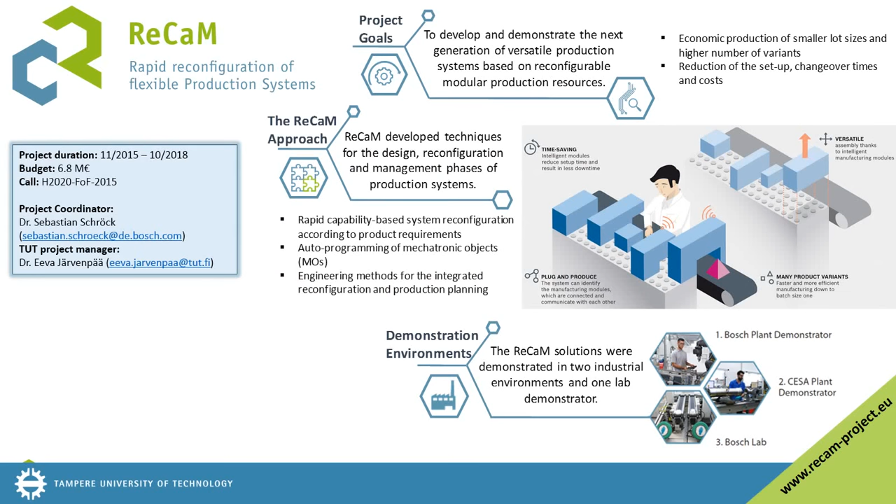Let's start by a short introduction to the ReCaM project in general and its targets. ReCaM was a Horizon 2020 research and innovation program funded project running between November 2015 and October 2018 and coordinated by Bosch. The project had 9 partners. These partners included manufacturing end users, technology providers, and research institutes and universities from different European countries.

The project targeted to develop versatile and easily reconfigurable production systems that would allow economic production of small lot sizes and high number of different product variants, and to reduce the time and cost of product changeovers and system setups.

To support these goals, ReCaM developed different techniques and systems to facilitate the design, reconfiguration and management phases of production systems. These included, for instance, an approach for capability-based matchmaking of product requirements against resource functionalities, auto-programming of mechatronic objects, and engineering methods for integrated reconfiguration and production planning. The ReCaM solutions were demonstrated in 1 laboratory and 2 real industrial environments.

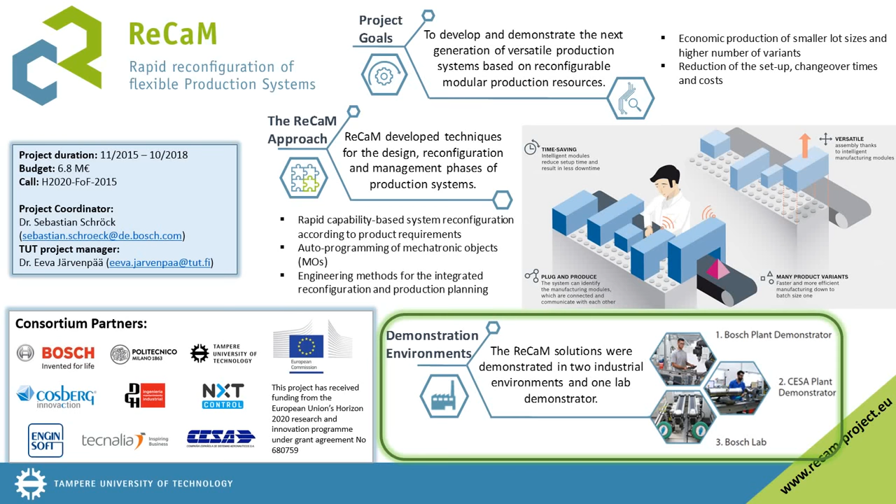This video will focus on the work conducted by the research group in Tampere University of Technology, Finland, namely the resource capability management and matchmaking. First, we want to give you an overall idea of the capability matchmaking concept. After that, we will go into more details of each component which makes such matchmaking possible. In the end, we will demonstrate the concept with real industrial data.

Let's start by explaining the overall objective of the capability matchmaking. The matchmaking scenario always starts with the need of producing a specific product. The system designer needs to figure out what kind of resources are needed to manufacture and assemble that product. Matchmaking supports both brownfield and greenfield design scenarios.

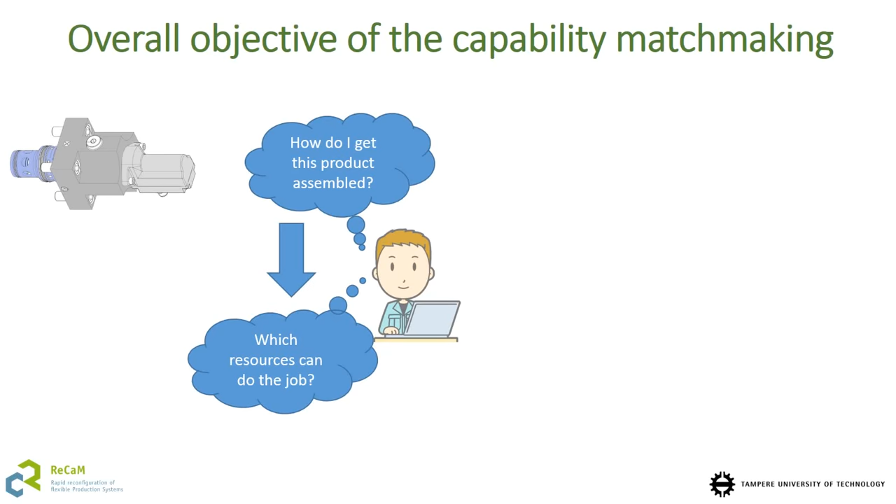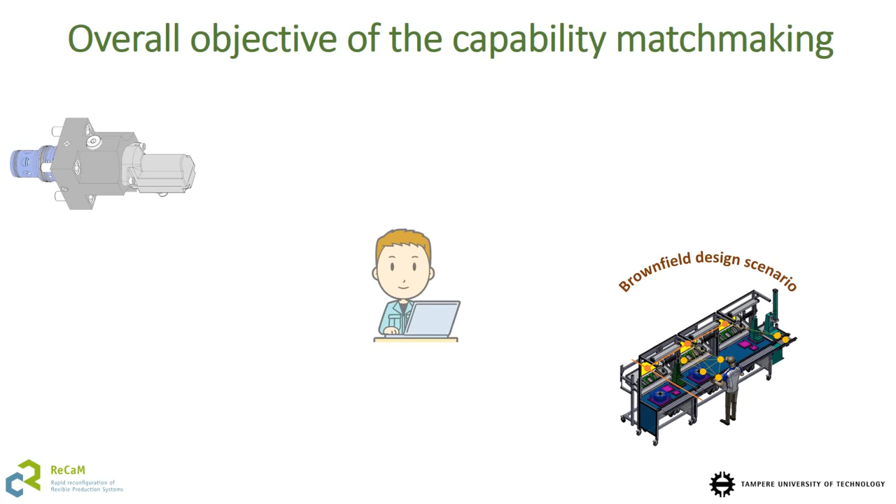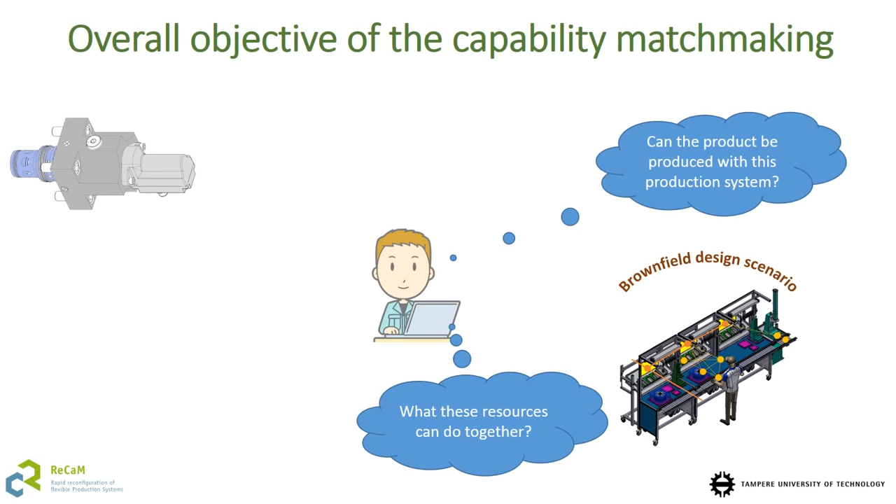In brownfield scenario, there is an existing production system which should be evaluated against the new product requirements and reconfigured to match with these requirements if needed. The system designer needs to analyze what is the capability of the existing system and can it produce the new product. Can all the needed process steps be completed and are there some changes needed to the existing system?

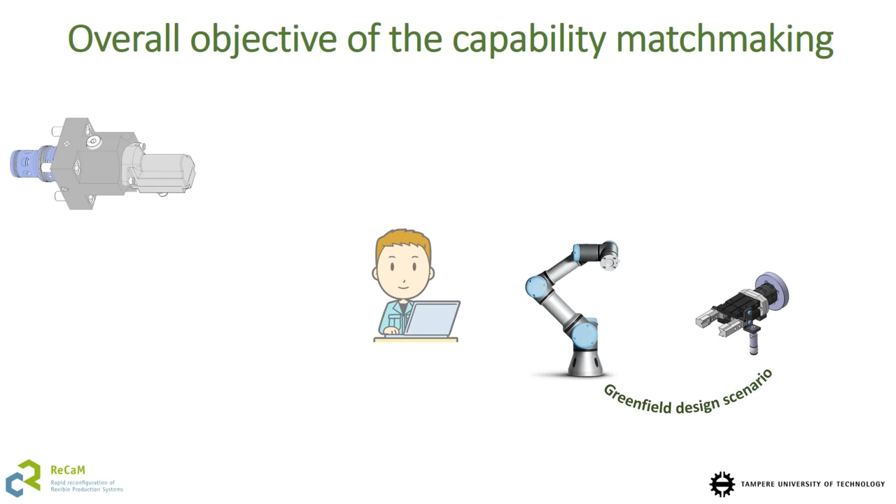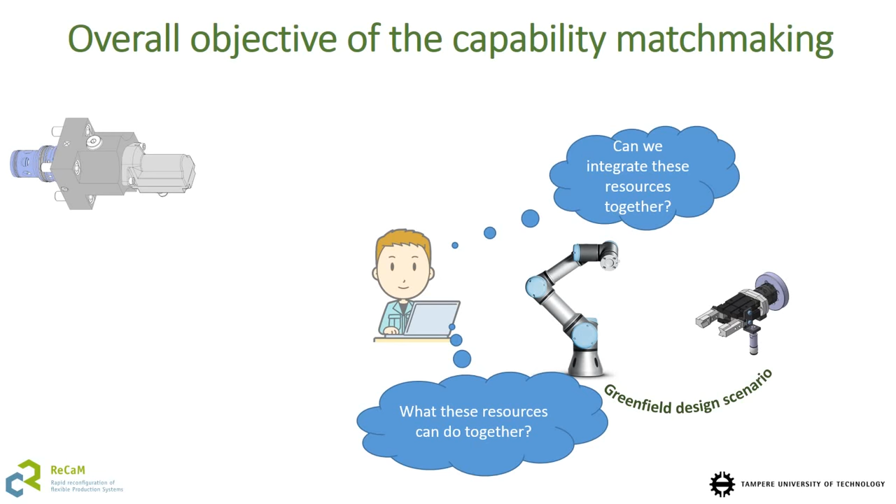Greenfield design scenario starts with an empty layout. There is no existing system. In greenfield scenario, the designer needs to find new resources from the resource catalogs which could produce the product. There are few aspects that the designer needs to evaluate during such process before making the final resource selection. Which resources can be combined together from their interface perspective? And what can these resources do together? Can these resources do the job at hand?

The capability matchmaking approach aims to partly automate this search and evaluation process, which is traditionally done by the human designer, and let the designer now concentrate on the final decision making regarding the resource selection.

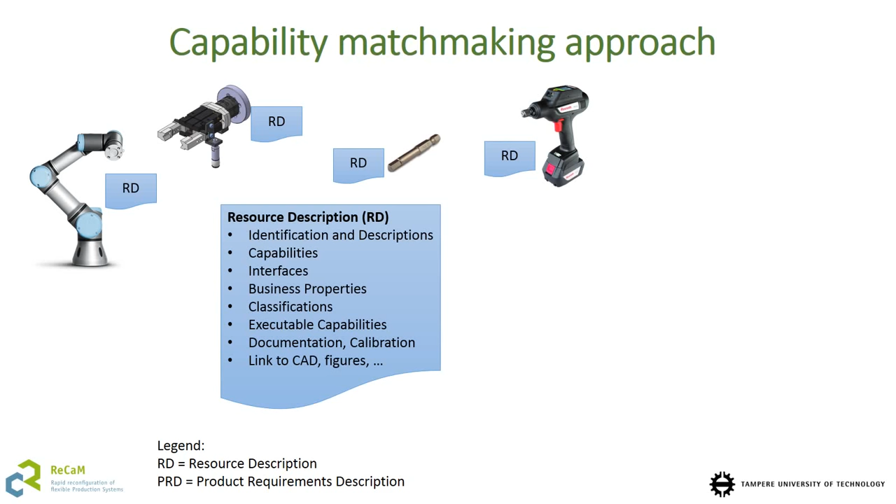The capability matchmaking relies on different information models that are used to describe the resources and products in a formalized way. First of all, the matchmaking presumes that predefined modular resources exist. For each different resource, a resource description file is created and published by the resource provider. This description represents the basic characteristics, interfaces, and properties of the resource. It can contain links to documentation, CAD models, and to illustrative figures. One essential part of the resource description is the capability description of the resource.

Central information model for the matchmaking is the capability model. It is a formal model for describing different capabilities, in other words, functionalities that the resources can have. When the resource is being described, the relevant capabilities are selected from the capability model and their parameters are detailed. The resource description files can then be saved to different catalogs, either global or local. From these catalogs, the potential end users, in this case capability matchmaking software, can then utilize these descriptions.

Also, the product requirements are described using a formal product information model. The product requirement description contains information about parts, how they are connected to assemblies, and what kind of processes and process parameters should be used. The product requirement description uses the same concepts that are involved in the capability model. Thus, there is a link between the resource capabilities and the process requirements of the product.

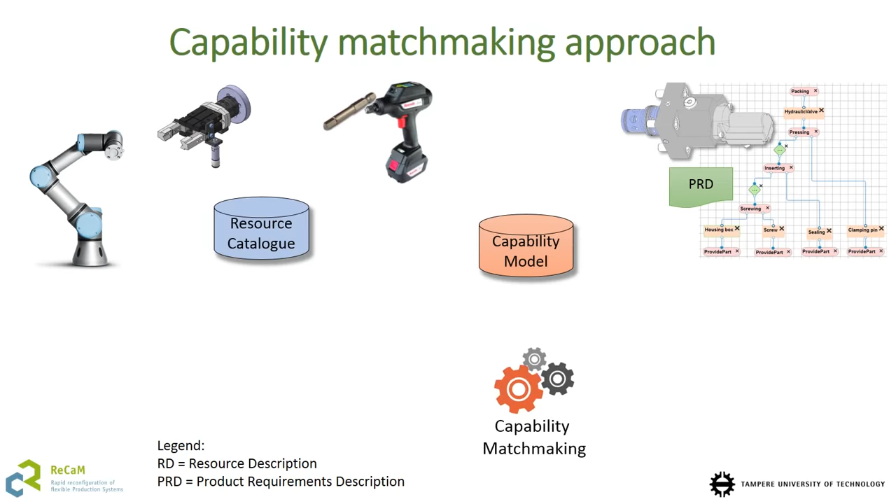The capability matchmaking is implemented as a service that the system designer may call through his desired planning system. When the designer wants to launch this service, he will have to give it certain inputs, which constitute the matchmaking search space. This input includes description of the product for which a match will be looked for, and the description of the resources that should be taken into consideration during the matchmaking. This may be either a description of the existing system layout or a pool of resources selected from one or various resource catalogs.

The capability matchmaking software will then process these inputs and provide the matchmaking result to the designer. The result indicates information about the resources and resource combinations matching for each process step of the product requirement. This information can then be further processed in the system designer's planning tool, where the desired resources are selected according to some company or situation-specific criteria.

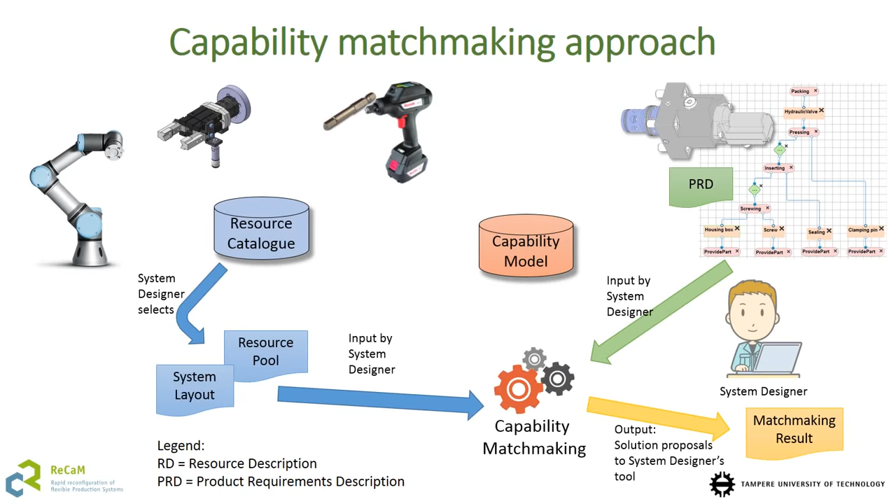Now, when you have the general overview of the capability matchmaking, we can go into details of its various aspects. Let's start with the associated information models. The matchmaking relies on various distributed OWL ontology models used to describe the products and resources. In the bottom, there is the process taxonomy model, which models hierarchical categorization of different manufacturing processes. Next, we have the capability model, which models the generic capabilities that resources may have. The capability model imports the process taxonomy model, and the capabilities implement processes defined in the process taxonomy.

On the next level, we have the resource model, which is used to describe resources. The resource model imports the capability model, and it models the resource-specific capabilities with resource-specific capability parameter values. The resource model also imports another ontology called resource interface model, which is used to give detailed description of the resource interfaces. On the other side, we have the product model, which is used to model the product characteristics and associated processing requirements. Now, let's elaborate these models in more details.

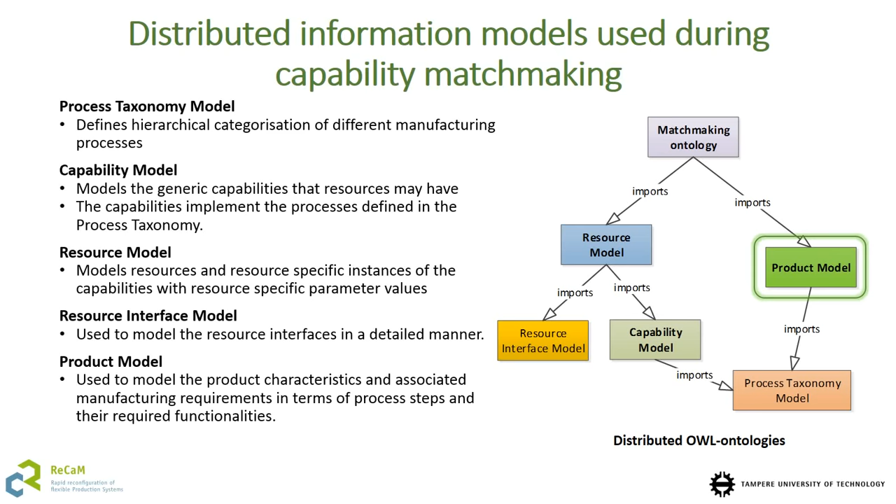The capability model is a formal ontology model which is used to model capabilities and their relations. Capability consists of concept name, such as drilling, milling, moving, and parameters which characterize the capabilities, such as payload, speed, torque, accuracy, and so on. The model consists of simple and combined capabilities, where the combined capabilities are combinations of simple capabilities. For instance, picking is a combined capability which requires as an input moving and some sort of grasping capability. The capability model forms a capability catalog, which is a pool of capabilities that can be assigned to resources to describe their functionality.

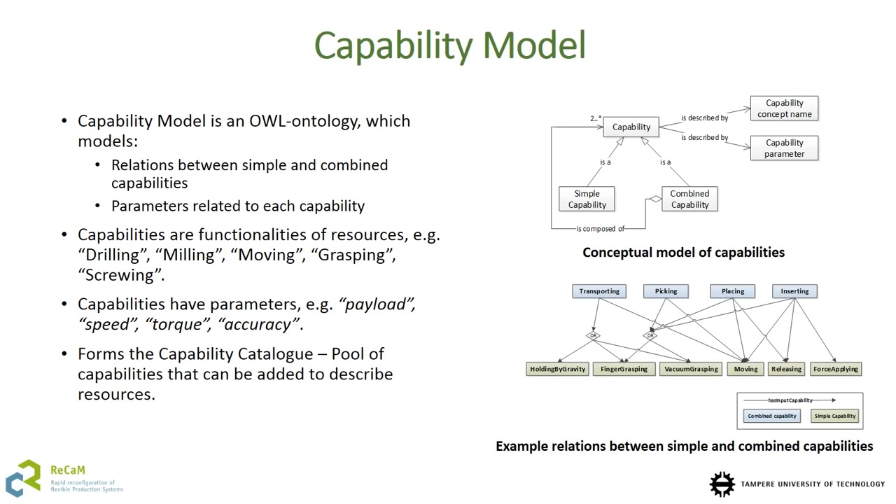The resource model ontology imports the capability model, and it is used to describe manufacturing resources and their capabilities. It can also be used to model systems composed of multiple resources. Device Blueprint class contains catalog information about resources, while the individual device class is used to represent the actual individual devices which may exist on the factory floor. The resources are assigned capabilities. And based on the relationships between simple and combined capabilities, it is possible to identify potential resource combinations that can have certain combined capability. These combinations can then be saved to the device combination class, and their combined capability can be saved through hasCalculatedCapability object property.

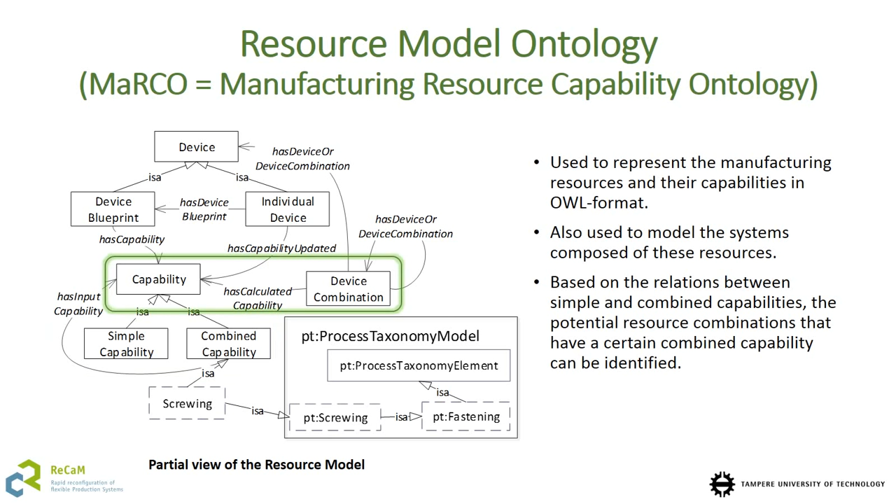Resource interface model describes the resource interfaces in details. It is used during the matchmaking for checking the compatibility of the resources from interface perspective. In other words, it is utilized to assess if two resources can be connected physically together. It includes information about the interface definition, including identifier, name, category, gender, and purpose of the interface, interface standards and its characteristics, information about the standardization organization, and interface port implementation.

The product model ontology is used to describe the product requirements for the capability matchmaking. It represents the parts and their basic characteristics, such as shape, dimensions, mass, and material, assemblies and subassemblies and their contained parts, processes related to each part or subassembly and sequence of the processes, and capability requirements related to these processes.

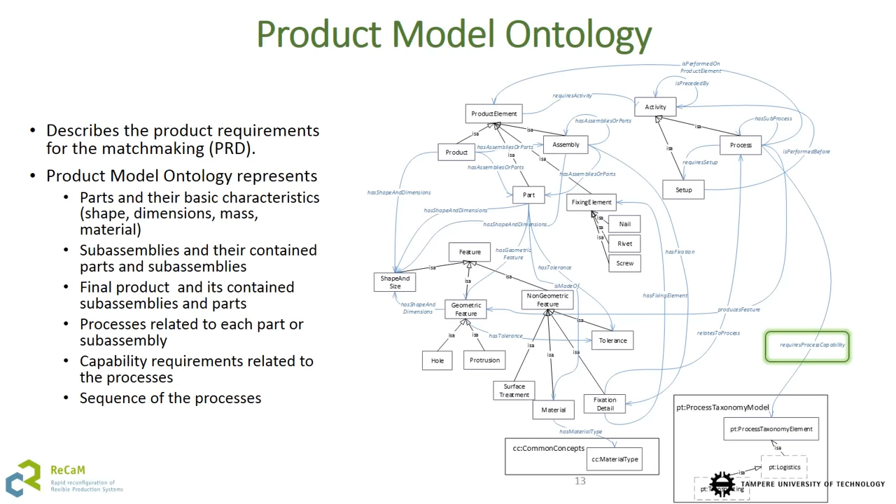Now, let's discuss quickly about what happens during the capability matchmaking. The capability matchmaking involves two aspects. First of all, the matchmaking must be able to generate new resource combinations for the different capability requirements. Secondly, the matchmaking needs to check if the capability of the resource matches with the requirements of the product. When new resource combinations are generated, there are two things to consider. What is the combined capability of the combined resources? And can the resources be combined from their interface perspective?

Combined capability rules have been implemented to calculate the parameters of the combined capabilities based on the capabilities of the resources involved in the combination. Interface matchmaking rules are used to check the compatibility of the interfaces between the resources that are planned to be combined. Finally, when the resource combinations have been created and their combined capabilities have been calculated, these combined capabilities need to be compared to the characteristics and requirements of the product. For this purpose, capability matchmaking rules have been defined. They are implemented inside the matchmaking ontology, which imports both resource and product models.

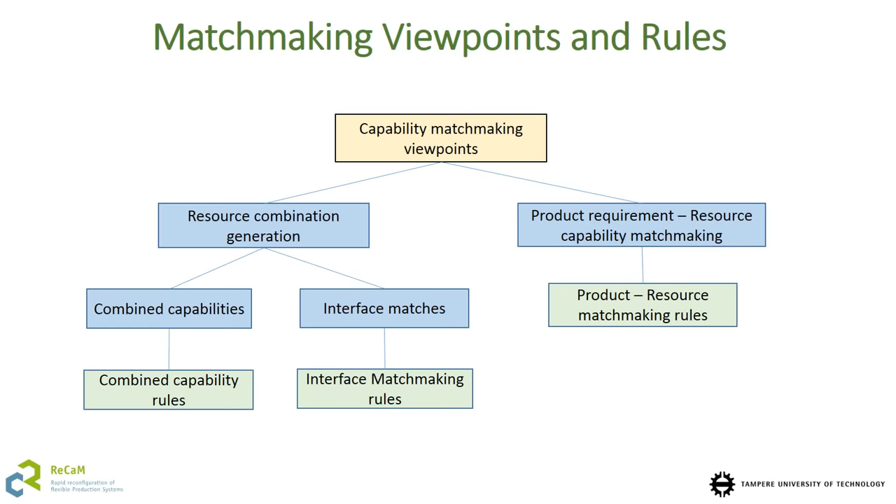The rules have been implemented with SPIN rule language. SPIN is an abbreviation of SPARQL Inferencing Notation. SPIN rules are attached to the classes of the ontology, and they extend the reasoning ability of pure OWL ontologies. The rule in the shown example is a combined capability rule, which is used to calculate the payload property of transporting capability, which in this case consists of moving and finger grasping capabilities.

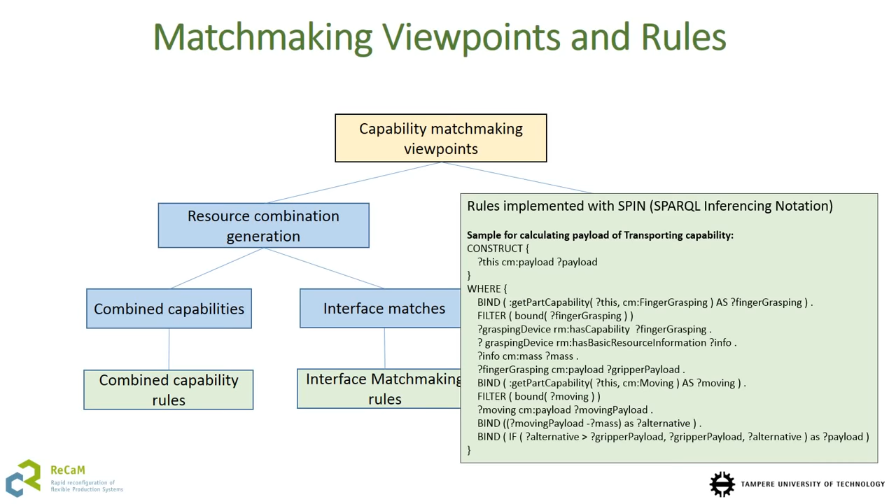The capability matchmaking approach has been implemented into a working software, which I will describe next. Let's look first how the capability matchmaking system interacts with external software and databases. The matchmaking has been implemented as a web service which can be utilized by any external design and planning tool.

The input sent from an external system to capability matchmaking is the matchmaking search space. It includes IDs of the product requirement description, layout, and/or the resource descriptions. Based on these given inputs, the matchmaking system will retrieve the product requirement description and the resource descriptions from the catalogs and read them into the matchmaking ontology.

As a result, the matchmaking system will output the matchmaking result, which contains the IDs of the PRD steps and the IDs of the resources matching with each of these steps. Depending on the given inputs, some steps may not have any matching resources.

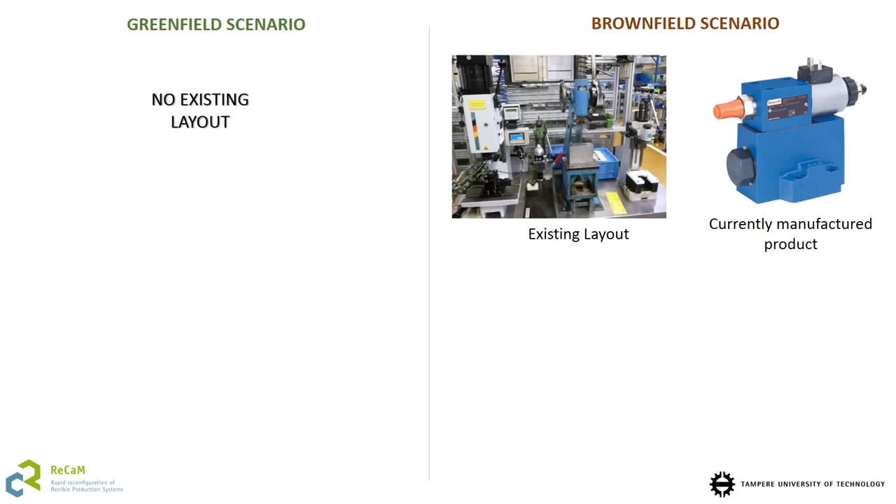Next, we will go through a simple case story which illustrates the use of the capability matchmaking approach in a real industrial scenario. We will consider the greenfield and brownfield design scenarios side by side and indicate whenever there are some differences between these two scenarios. In the greenfield scenario, the design starts with an empty layout, and the whole system should be designed from scratch. In the brownfield design scenario, there is already an existing system layout that has been used to produce some other product. In both scenarios, the story begins with a new product that should be assembled.

In order to use the capability matchmaking, the product or process designer has to first create the product requirement description for the new product. That will be used as an input for the matchmaking. Here you see an example product requirement description and its content. In this illustration, it is modeled with the Protege ontology editor in the product model format. It contains the description of the parts and assemblies, the processes, and their related process capability requirements, including the parameters.

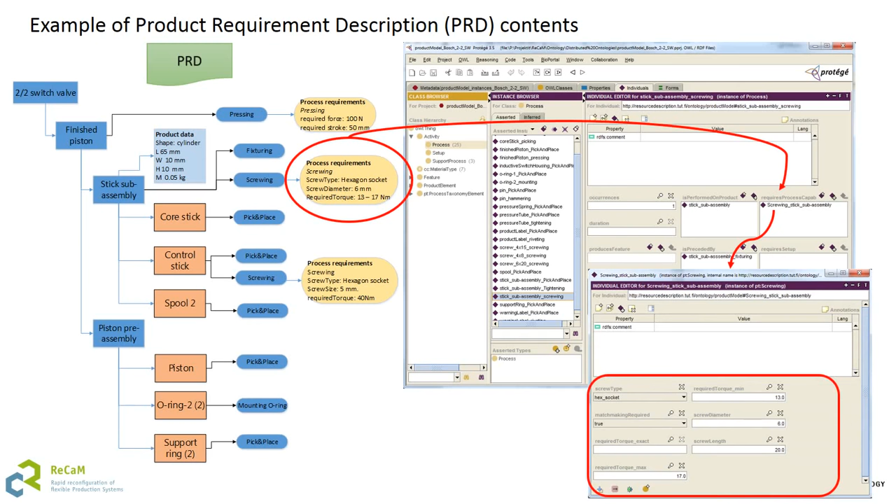The matchmaking obviously needs information about the resources. Thus, a prerequisite for the matchmaking to work is that the resource providers have generated the resource description files of their offerings and published them in some catalogs.

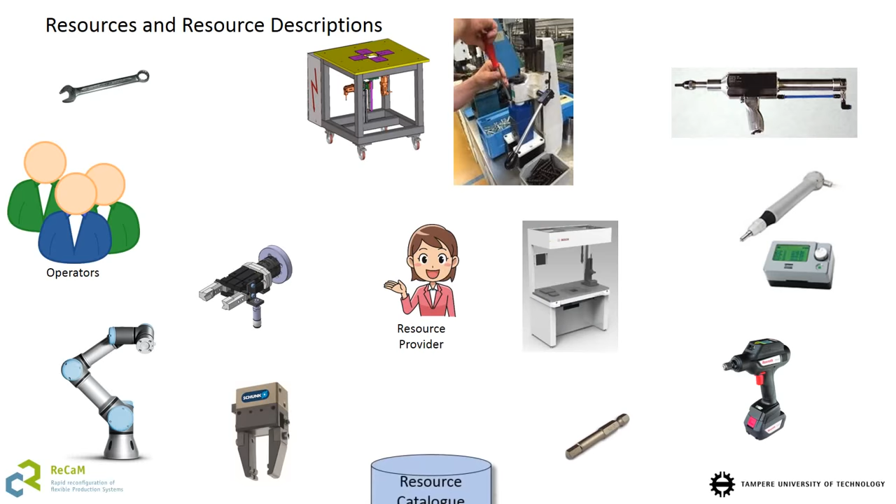Another input given by the designer for the matchmaking is the resource pool. It consists of the resources from the resource catalog which the system designer wants to include into the matchmaking search space. In the brownfield scenario, also the existing layout description is given as an input. The system layout consists of the description of the existing resource combinations on the current system.

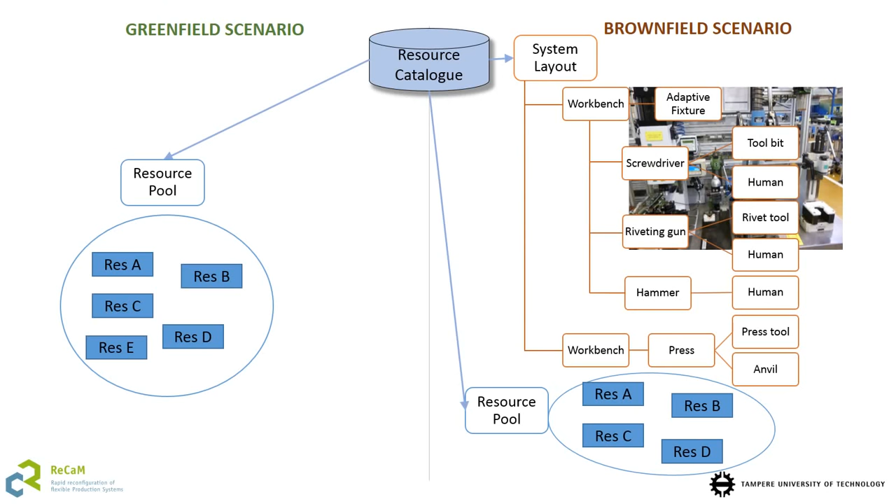The matchmaking service doesn't have a graphical user interface of its own, but it can be called by other software. The system designer or reconfiguration planner may use his preferred design or planning system, which then sends these matchmaking inputs to the matchmaking web service.

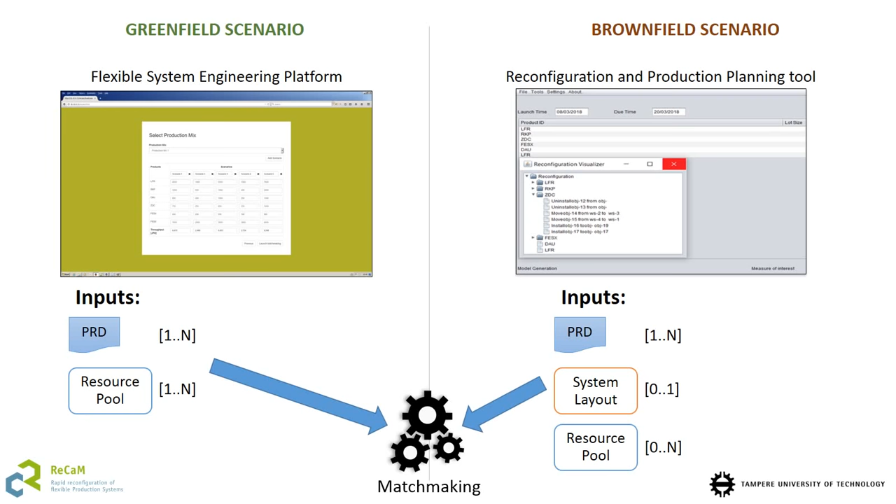In the ReCaM project, these software were the flexible system engineering platform used for the greenfield design scenario and the reconfiguration and production planning tool in the brownfield design scenario. These software were developed by the Italian partners EnginSoft and Politecnico di Milano. Now, let's see what happens inside the capability matchmaking system when a request is sent.

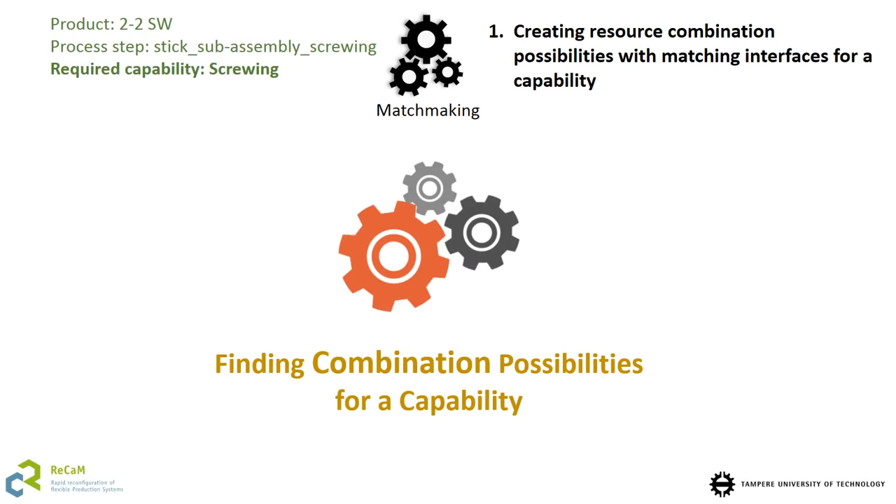The matchmaking will check each process step one by one. In our example case, we'll use a process step which requires screwing capability. First, the matchmaking will create new resource combinations for the required capability at capability name level. While creating these combinations, it will simultaneously check that the interfaces of the resources match and the resources can be physically connected together. In this case, the toolbit doesn't fit to the screwdriver, and thus the incompatible combination is filtered out.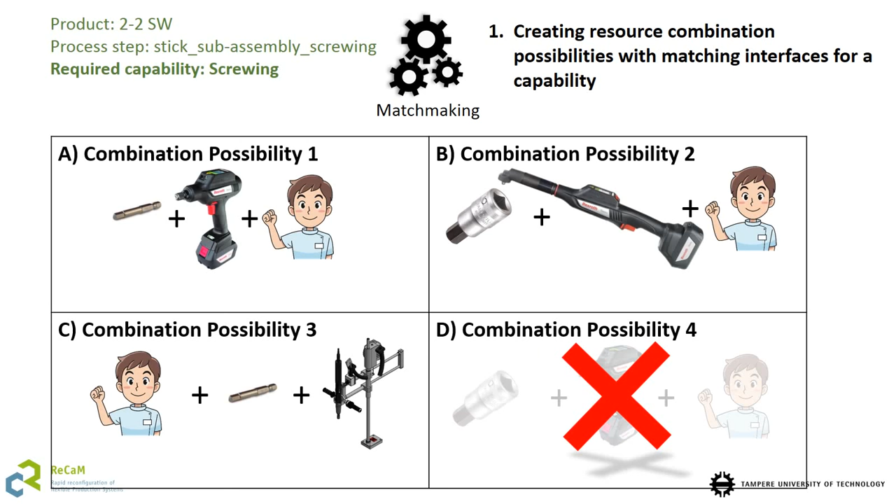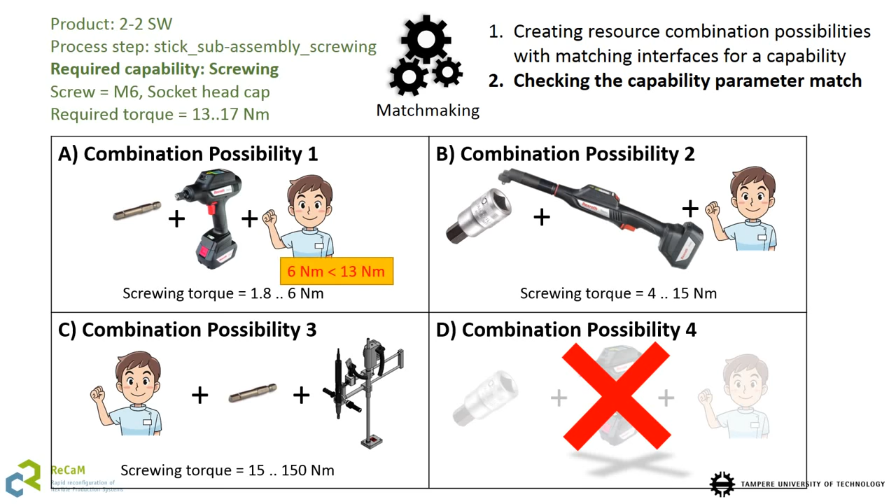After that, the matchmaking will check that the capability parameters match with the parametric requirements of the product. In this example case, it will check that the screw type and screw size match with the tool size and that the provided torque is within the range of the required torque. Unsuitable resources and resource combinations are again filtered out. In this case, combination possibility 1 does not provide enough torque and it is eliminated from the result. Only the suitable resource combinations are left as suggestions in the matchmaking result.

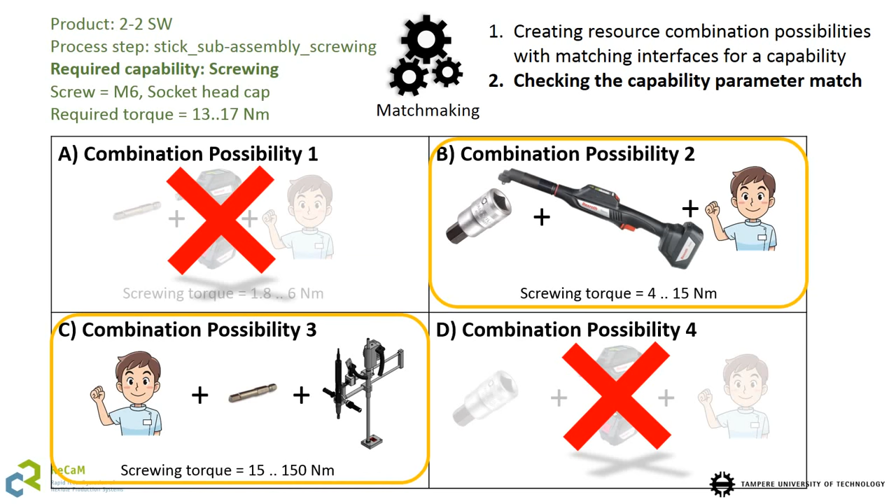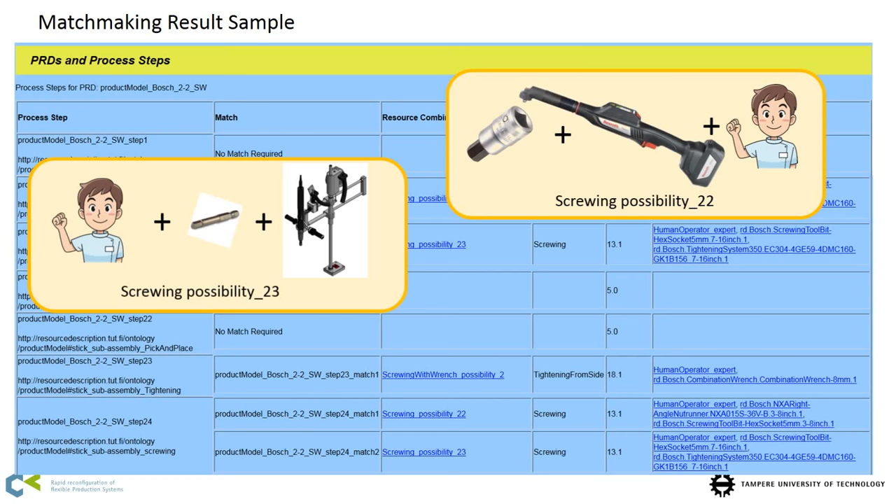Here you'll see an example of the matchmaking result in HTML format. It shows the process steps, found matches for the process steps, and the resources which are included in these found matches. Furthermore, a rough estimation of the average processing time with the given resource is provided. The two proposed resource combination possibilities from the previous example are highlighted here.

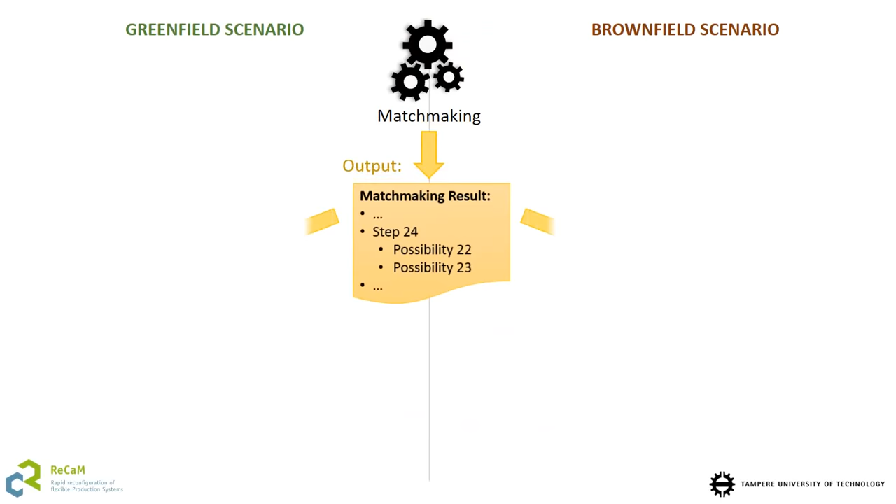After the results are generated by the matchmaking software, these results are delivered back to the client that was requesting the matchmaking. The results contain each process step and the possible resources and resource combinations that can do the requested step. The matchmaking system doesn't provide a ready system design. It is the task of the designer to select which of the suggested resources and resource combinations to use and how the tasks should be allocated into the workstations.

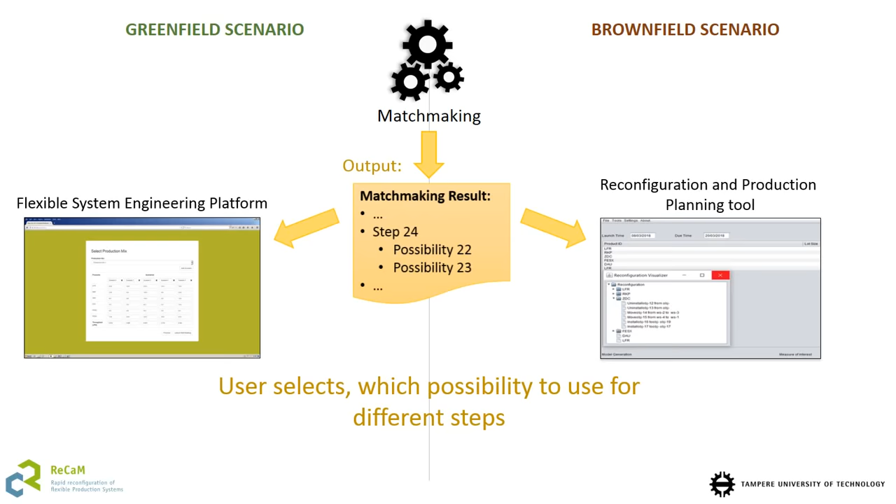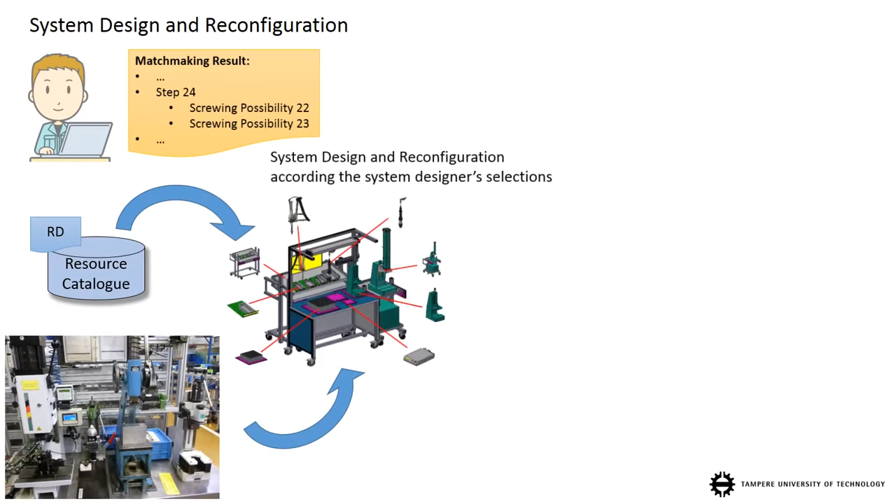In order to do the system design and reconfiguration decisions, the matchmaking results can be further analyzed with the designer's planning system. With the help of this system, the designer will make decisions on what resources should be used, how the existing system needs to be reconfigured, and how the new layout should look. Once the new configuration is in place, the production of the new product can start.

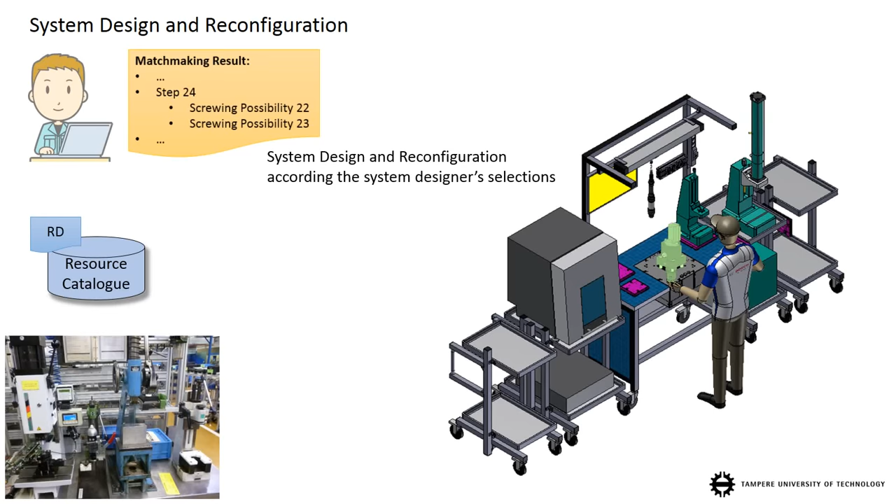Finally, we want to emphasize that the matchmaking supports an iterative approach in which the search space may be gradually enlarged during the design process. The process and inputs depend on the reconfiguration or design strategy the designer wants to apply. For instance, the matchmaking may start with only the current layout to see if the existing system as such could produce the new product. If that is not the case, the existing layout may be broken down to allow new arrangements of the resources. Next, the resource pool may be extended with other in-house resources existing in the company storage. Finally, the search may be extended to global resource catalogs from various resource providers. It is up to the designer what kind of strategy to apply. Thus, this sequence was just an example.

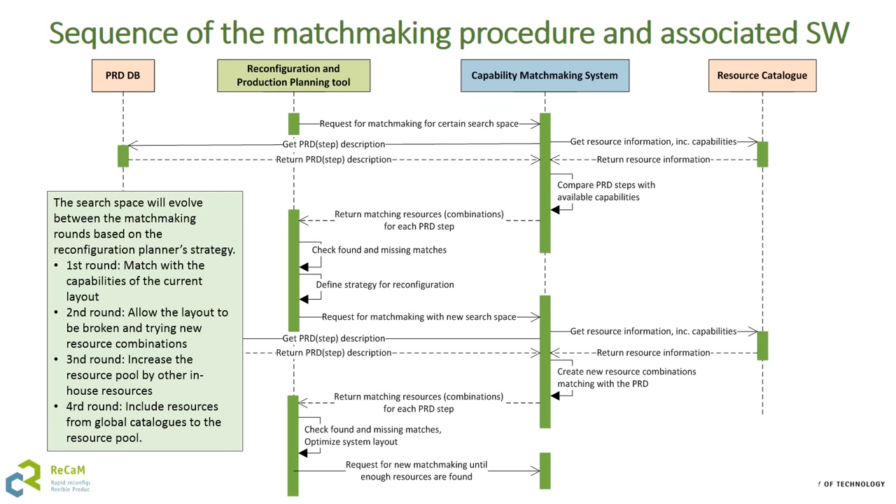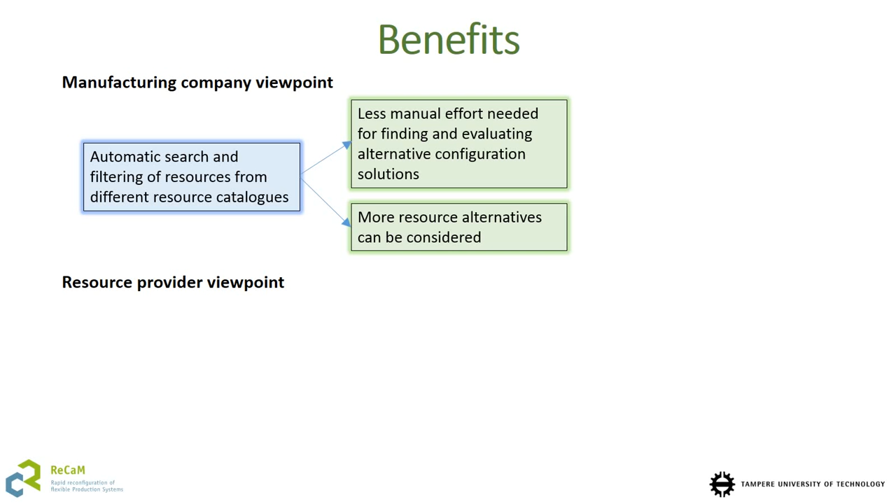We would like to conclude this video by briefly discussing the impact of the presented resource management and capability matchmaking approach. For manufacturing companies and system integrators, the matchmaking can provide automatic means to search and find alternative resources and resource combinations for specific needs from different resource catalogs. This means that less manual effort from the designer is needed to find and evaluate different alternative solutions, and more alternative resources and configurations can be considered than earlier, as now the time-consuming search and filtering is performed by automatic means. This may also lead to innovative solutions that would not have been considered with the traditional manual design approach.

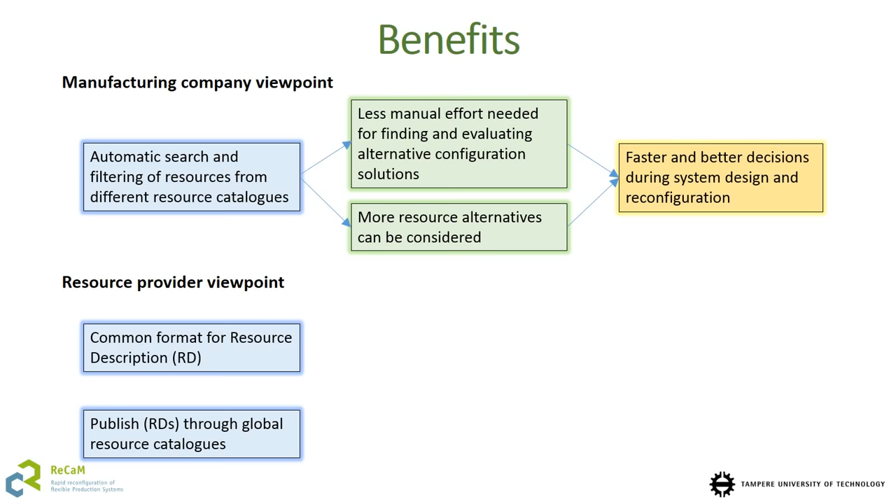Based on these advantages, the matchmaking approach can reduce the time needed for system design and reconfiguration planning, and thus enable more flexible and adaptive manufacturing of high-variety products. From the resource provider viewpoint, our approach provides a common format for describing the resource offerings. These resource descriptions can then be published through global resource catalogs. The common description format means that different resources from different vendors can be easily compared, and also their integration into an overall multi-vendor system gets easier.

Through the global resource catalog, the company will get wide visibility for their offerings. Also, it is beneficial that automatic matchmaking approaches, like the one described in this video, can automatically find these resources from the catalogs. All this is expected to improve and increase the business opportunities of the resource providers.

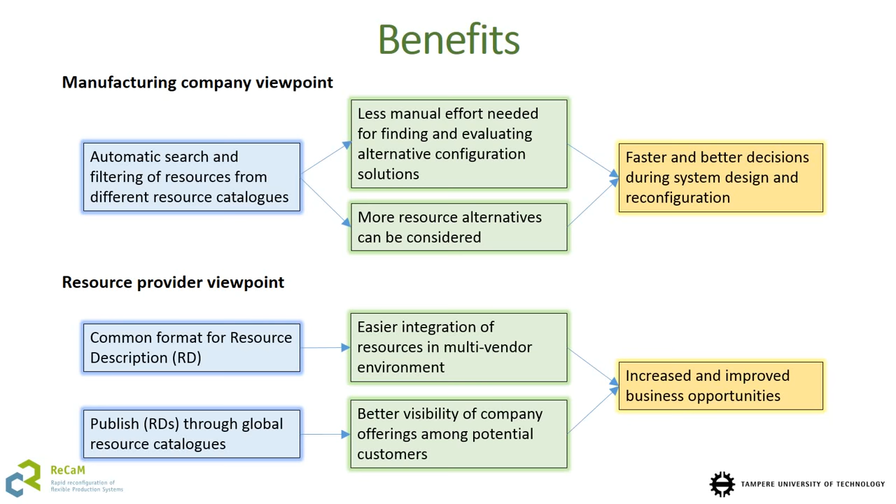We would like to thank you for watching this video about capability management and matchmaking. The explained work was performed by Tampere University of Technology during the Horizon 2020 research project ReCaM.